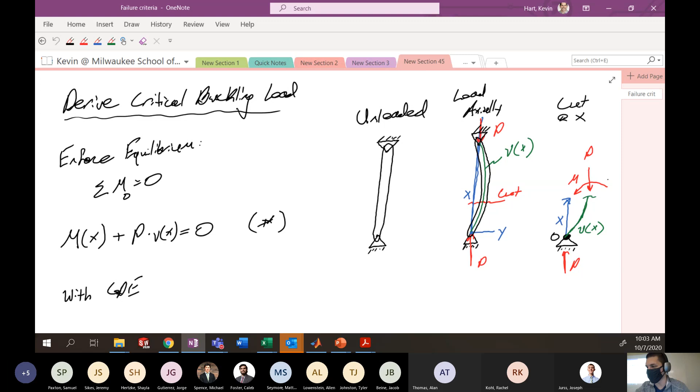Okay, so let's talk about where we were. We were deriving the critical buckling load, and these are the notes we had going last time. The basic idea is that you have some long, slender member here that's going to be loaded.

Some long, slender member that's going to be loaded axially. So we have these loads P that are being applied at the end of this structure, in this pinned configuration, and that's causing this bar to bend with this sort of curvature that you see here.

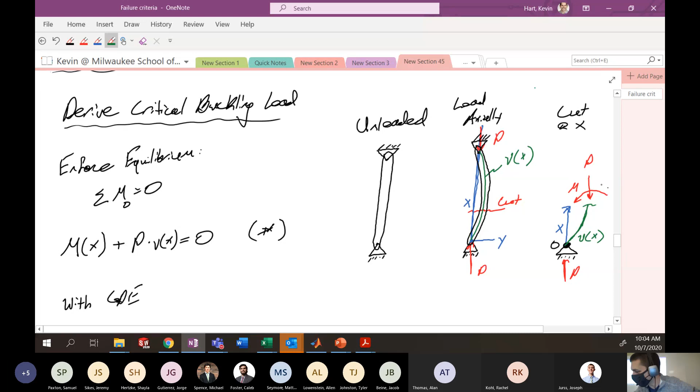The idea is that we're going to label the neutral axis of this bar that's in bending with this elastic curve, v of x, which tells us the amount of deflection from the normal x-axis. From this, we know there are internal forces and moments through the bar which we cut, allowing us to write an internal moment at that location in terms of the applied loads. It looks like this: the moment equals negative load times v of x, where v of x is the distance we've displaced from buckling.

That's our general setup here, and we're going to go through the governing differential equation of beam bending to derive the critical buckling load that would cause this to occur. So that's kind of where we were last time.

The next step would have been to look at this general governing differential equation for bending, which is v double prime equals M over EI, something you should have seen in 2004. We were making our way through that. So we did that, and put it in standard form as you see here.

And then we assigned P over EI to be omega squared. Here we're making a substitution, where omega is the square root of P over EI. That gives us this differential equation for the bending situation we currently have.

This is the equation from your differential equations class. Hopefully you talked about this very standard equation. This is an equation for a simple harmonic oscillator. If not in differential equations, hopefully you talked about it in dynamic systems. Vibrations and dynamic systems, to me, they're equivalent.

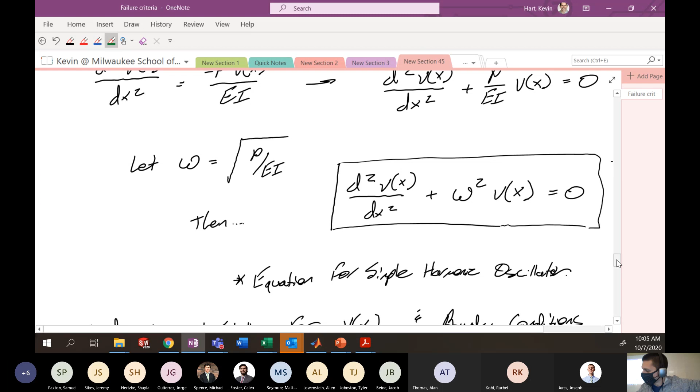But anyway, so there's your governing differential equation for a simple harmonic oscillator. And if we want to solve this equation, we need boundary conditions and a general solution. So the general solution for this governing differential equation, v of x, is given by A sine omega x plus B cosine omega x.

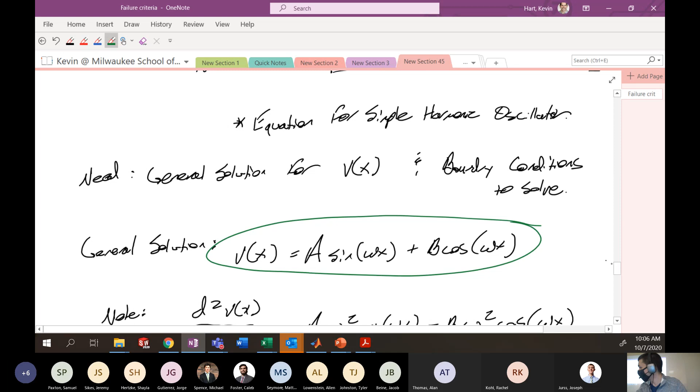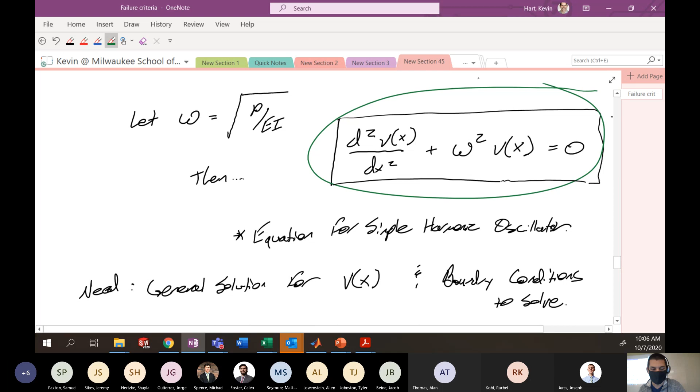And then the second derivative of that equation looks something like this. If you were to plug these two pieces of the general solution back into the governing differential equation up here, you would satisfy this equation for all values of A and B. That's what it means to be a general solution for a differential equation.

Now, to more accurately solve this general equation, we need boundary conditions to find capital A and capital B. So we were talking about some of the general boundary conditions for this beam in bending—and bending, but it's actually buckling.

Some of those boundary conditions are identified by the pinned configuration we have. We have a pin on the bottom here, a pin on the top here, and that allows us to define things about the displacement at those pins, which would be a boundary condition, and also the bending moment at those pins, which would be zero. So we laid out all of those boundary conditions here.

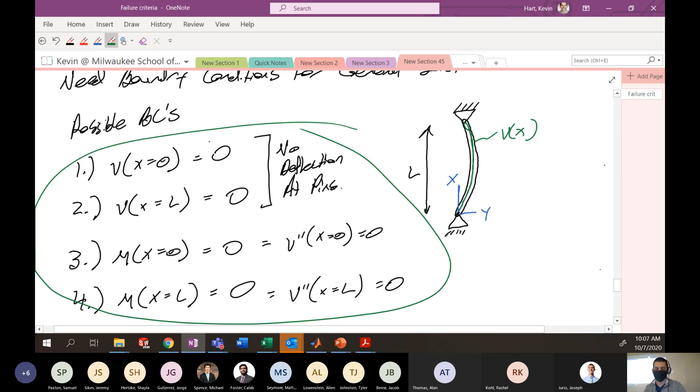We're going to use some of those to solve our general solution. We had made our way through that a little bit by using boundary condition number 3, which we said was no bending moment at x equals 0. So that is this particular boundary condition here.

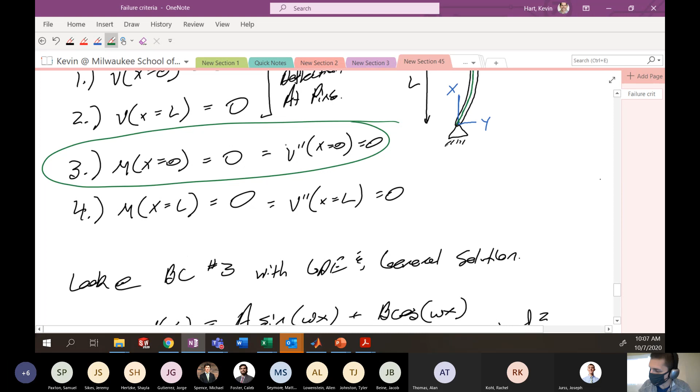And if we plug that into our general solution, and set that to be true, what you'll find is that the coefficient B is going to be equal to 0. That was using boundary condition number 3, and that simplifies our general solution down to this particular form.

Now we have to look at one more boundary condition so that we can solve for this variable, capital A. So that's about where we left off last time.

We're getting a little bit mathy, but it's all going to hit a practical point very soon. I know it was a mathy day last time. I hope you brought your math pants and were wearing your math pants. But we're going to put it to a head here and actually show what it means in reality moving forward.

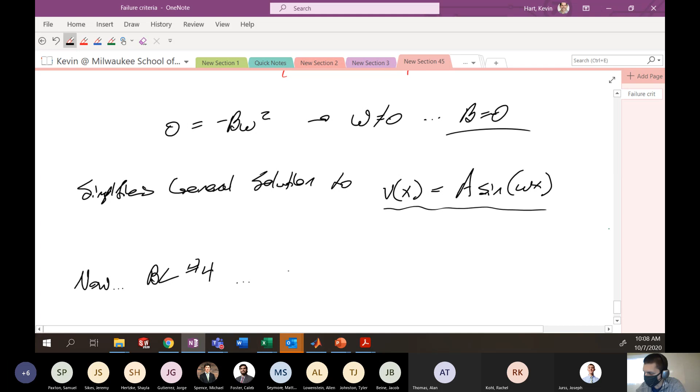Okay, so we've used boundary condition number 3. Now let's use boundary condition number 4. To remind you what that is: the second derivative at x equals L is equal to 0.

Okay, so if we work this guy down, and we want to take the second derivative of that, this is just going to be negative a omega squared sine omega x.

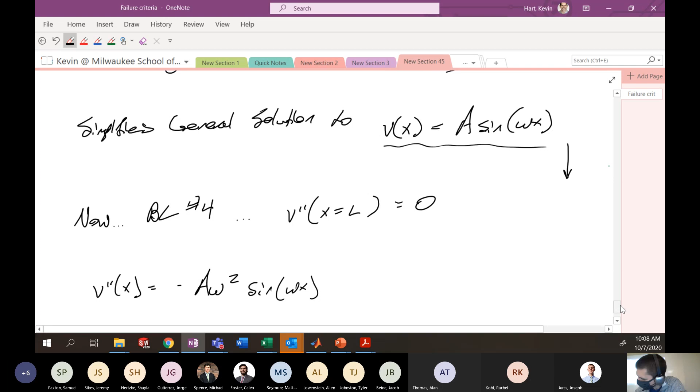And we'll insert our new boundary condition here. So if I do that, my left-hand side here is 0. And we have negative a omega squared times sine of omega times capital L, which is the length of the bar, plugging in L for x.

So the question then is, what values of A make this true? Someone give me one value of A that might make this true. Jordan says 0. Okay, cool. I agree with that. We say one trivial solution is capital A equals 0.

That doesn't really tell us anything. It just says that if we have no load on the bar, our boundary conditions are met, which is obvious. So this doesn't really tell us any information. The other more interesting condition would be if this portion of the equation were generally equal to 0. So the non-trivial bit...

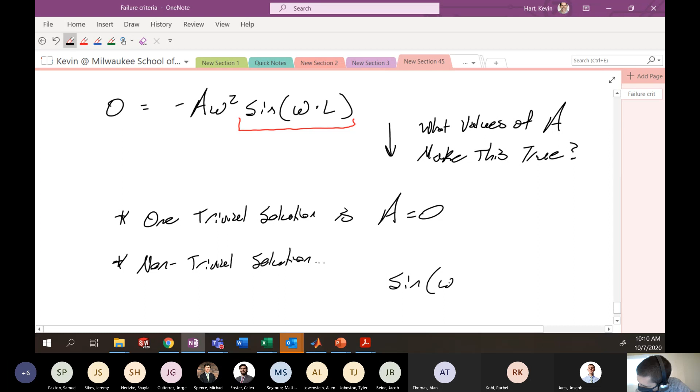is the solution sine of omega L equal to 0. This is the interesting portion for us, and I'll show you why in just a second. So if this is the important bit of information, I'll ask what values make this true for, let's say, omega L, right? How would this be satisfied? What value does omega L need to be for this to be true?

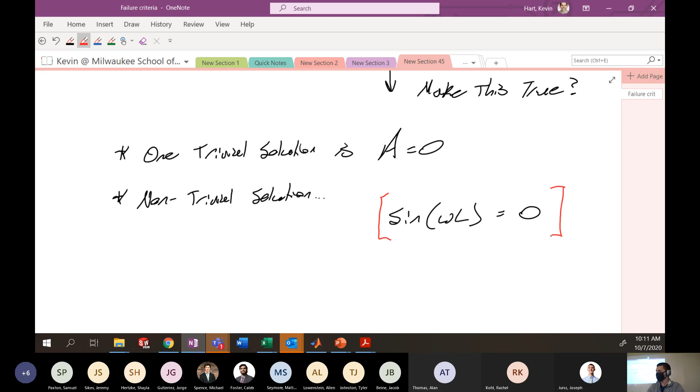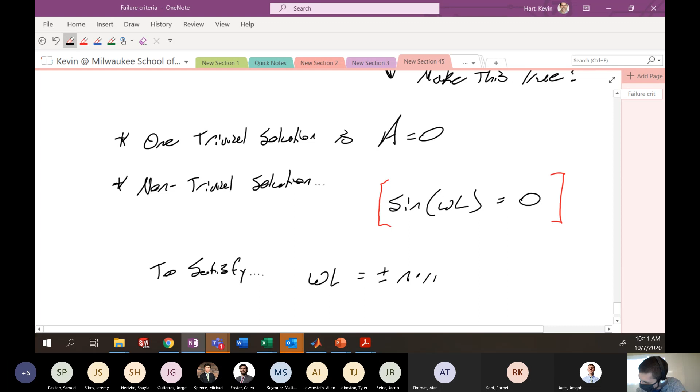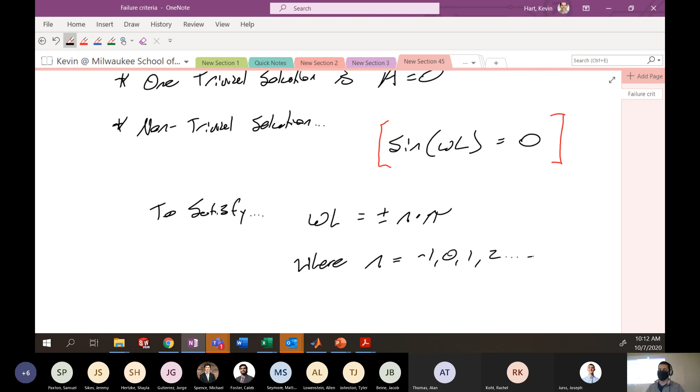0, or some integer of pi, right? So 0, pi, 2 pi, 3 pi, etc. So to satisfy this, omega L has to equal plus or minus n times pi, where n equals -1, 0, 1, 2, and so on, integer values. This is the important bit, and this is how we derive the critical buckling load. We enforce the governing differential equation must hold given certain boundary conditions, and we look at the non-trivial solution, which here would enforce that omega L has to equal n times pi.

So remember what omega L is. We'll enforce omega L equals n pi. And recall that omega, as we defined before, is the square root of P over EI. Hopefully it's all coming together. So let's plug this back in and see what value of P makes this true.

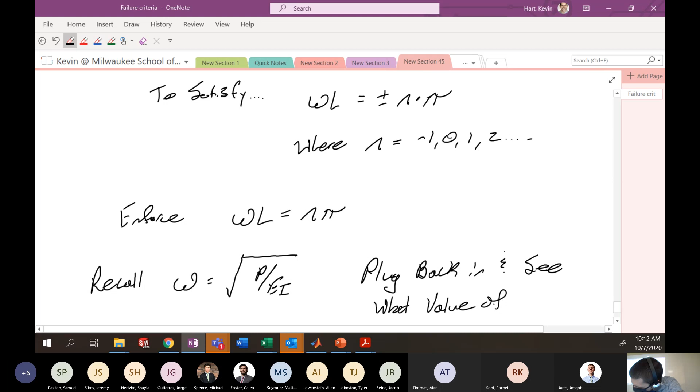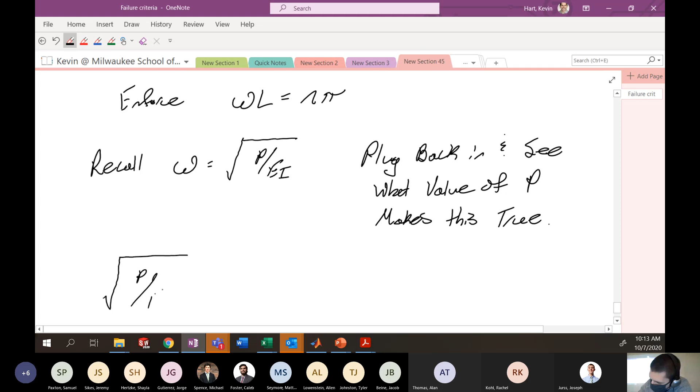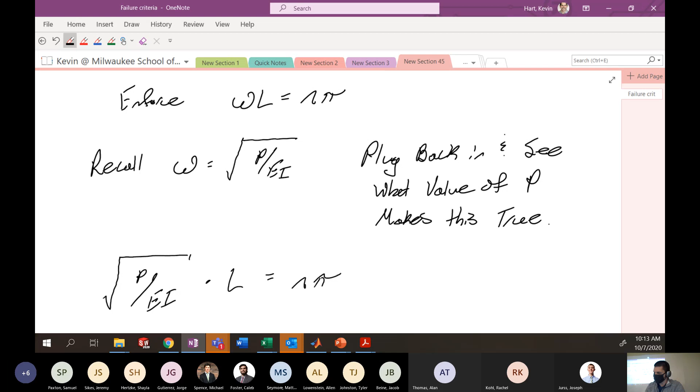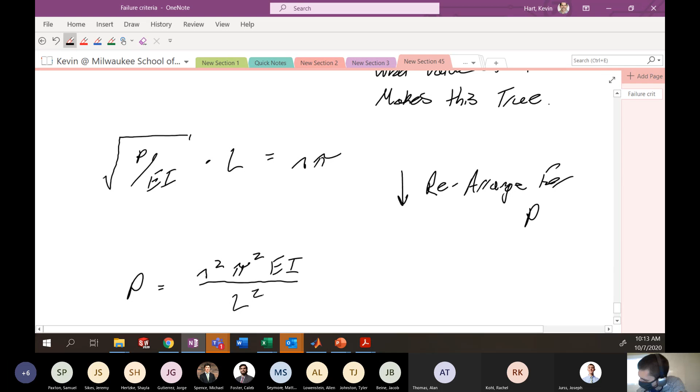So we would have something like square root of P over EI times L equals n pi. We rearrange for P, and you will have n squared pi squared EI over L squared. This is your critical buckling load for failure.

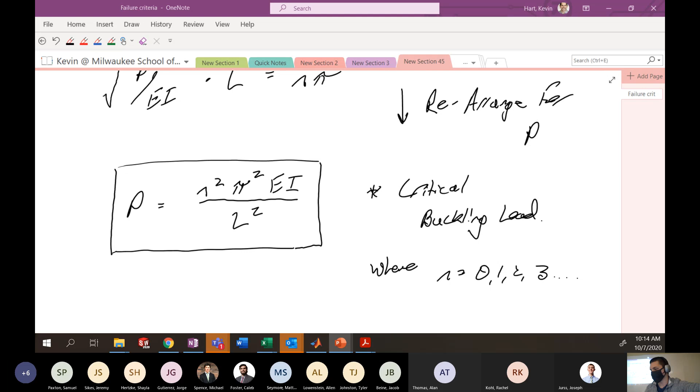Where n equals 0, 1, 2, 3, etc., integer values. Now, what does this really represent? What is the n squared? Well, let's talk about this. And what is n physically?

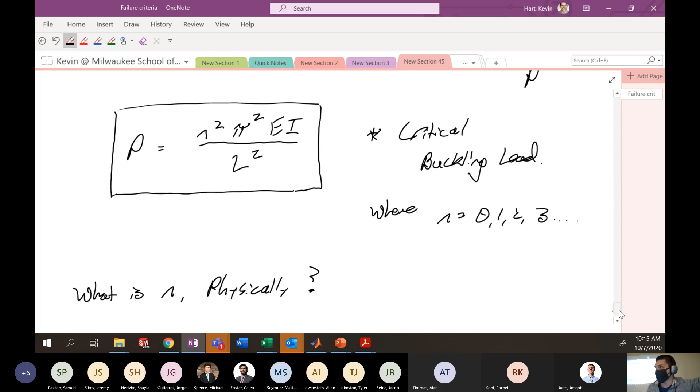Well, if we plug in n equal to 1, this would get you back to that particular equation you would have seen in your 2004 class. The picture here would look something like this. If you're applying load on the ends, this is the picture you want to have in your head. That would give you something that looked like this for your bar. It's buckling, and it's buckling in the fashion you're used to seeing.

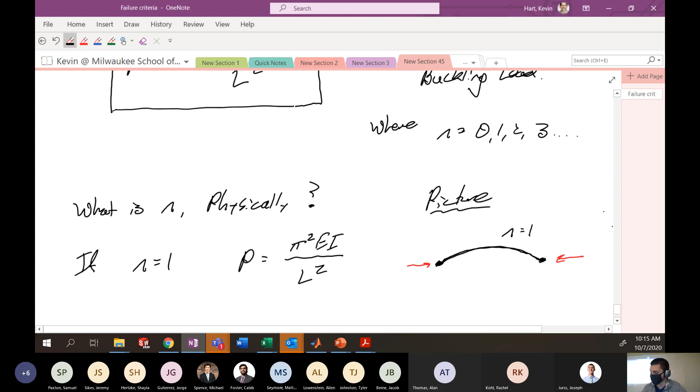This is the smallest possible load that could be induced to cause buckling. And remember, this is like V of x, and we have a general solution for V of x. Uh-oh, did I just lose the call? No, okay, I'm still on the call. Made some funny noise.

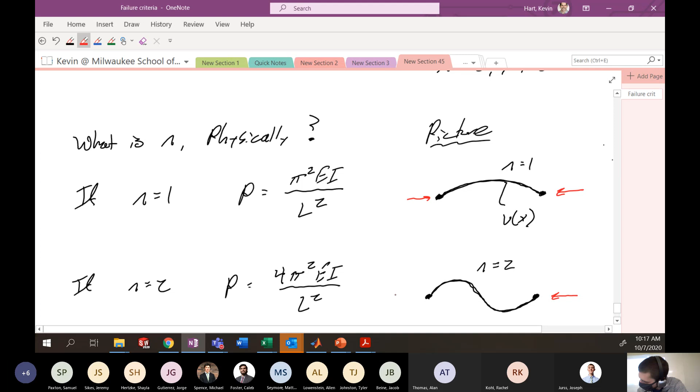You could go through a similar process and look at what happens if n is 2. Here we have n squared pi squared, so this is going to be 4 pi squared EI over L squared. The picture here, we still have the same bar, but if we use a value of 2 for n, we have a different equation for v of x that we could draw that might look something like this. And you could continue with this process.

So recall, we had this general solution that was V of x equals A sine omega x, where omega contains your p-value, okay?

So basically we're just changing the frequency of what the shape of the beam looks like with different values of the critical load satisfying the governing differential equation. If I put this amount of load on my structure, I'm going to see bending or buckling in this particular fashion. This is the smallest amount of load that could potentially induce this buckling. When we talk about the critical buckling load, we're just talking about this first modality that could potentially exist. But there are other modalities that could exist, right?

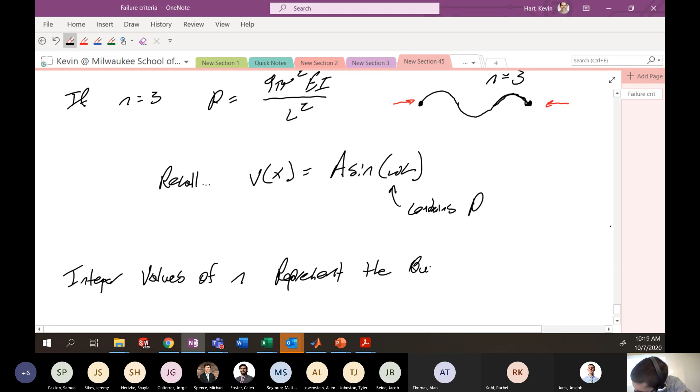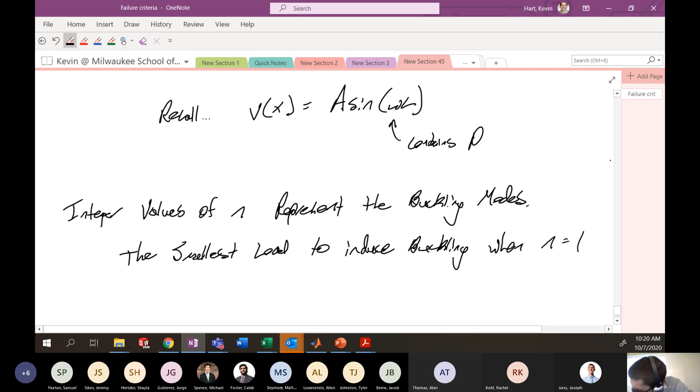The smallest load to induce buckling is when n is equal to 1, obviously, and we call that the critical buckling load. You have probably seen this as PCR, pi squared EI over L squared.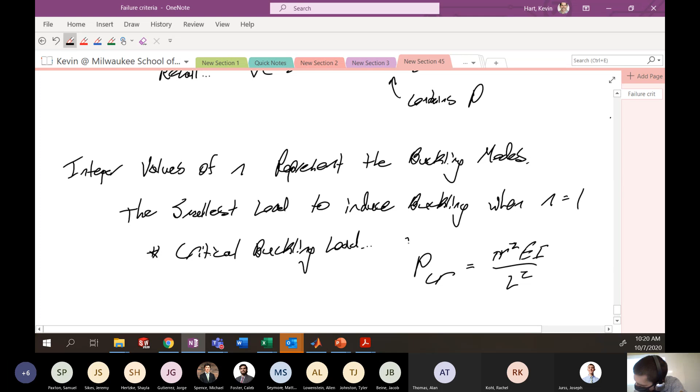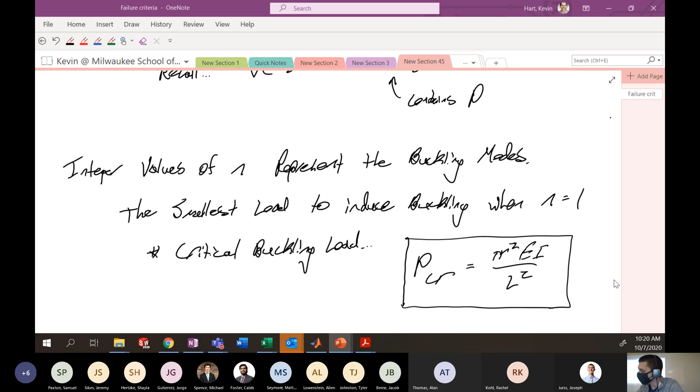So this is, again, just deriving something that you should have seen in 2004 already. There's a nice picture of the various buckling modes in the notes if you haven't seen them, so go ahead and take a look at that.

All right, so we talk about this critical buckling load, but in this class we like to talk about a critical buckling stress. That's just something that's a little bit more useful to discuss. The load is nice to know what would cause failure, but most of the time we want to talk about what stress values would cause failure because we're usually analyzing in terms of stress, not load. And when we talk about eccentric loading later, we're going to talk about the stress on the cross section, not necessarily the loads. So we want to speak about what stresses might cause failure as opposed to what loads might cause failure.

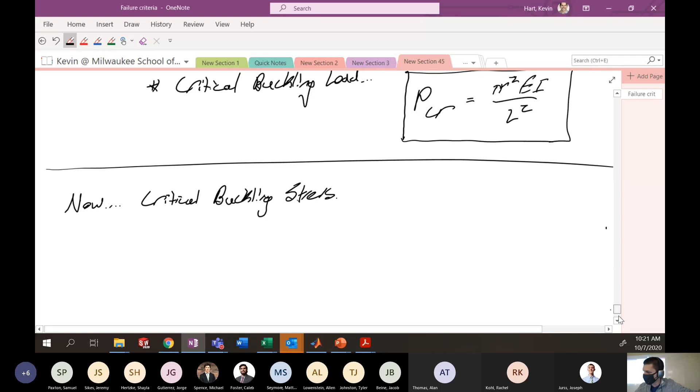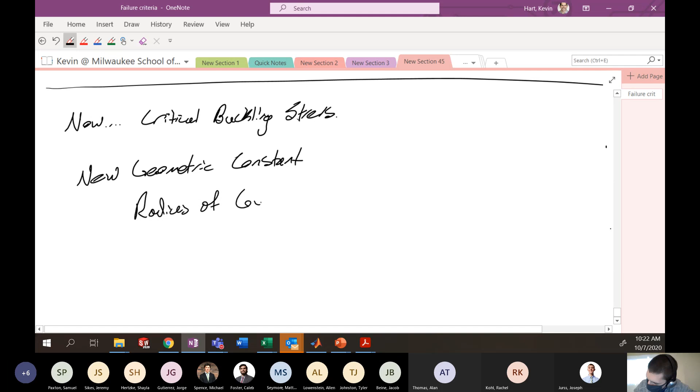So let's talk about critical buckling stress. And to do that, I need to introduce a new geometric constant, which we call the radius of gyration, usually given by the variable little r. The general expression for the radius of gyration is the square root of the area moment of inertia of the cross-section I divided by the cross-sectional area A.

So this is the definition of radius of gyration. The units are like meters or feet, length to the 1 power. Remember that this term is like length to the 4th, this is like length to the 2nd, so length to the 4th divided by length to the 2nd gets me length to the 2nd, and the square root is length to the 1st. So radius, you would think like a typical measurement.

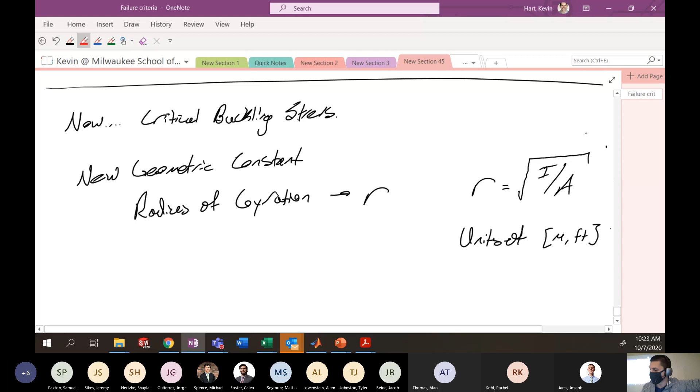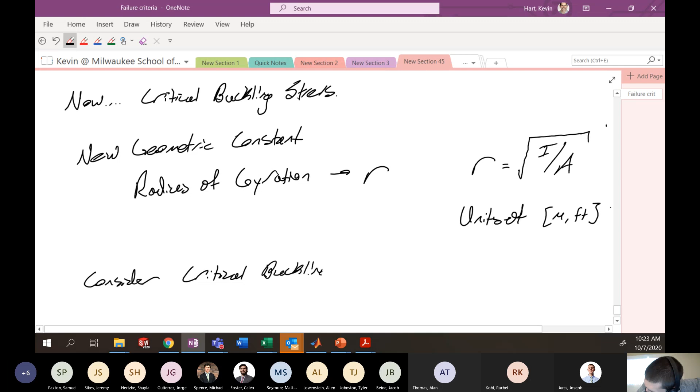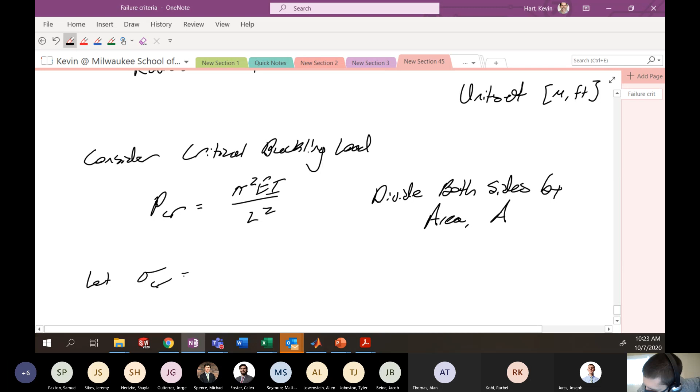So why is this important? Well, it's important because if we talk about failure stress or the critical buckling stress, we take the critical buckling load and divide by area A. That would give us a critical buckling stress on the left-hand side. Critical buckling load divided by the cross-sectional area gives the critical buckling stress on the left-hand side as pi squared E times I divided by A, all over L squared, because remember, I need to divide both sides by A.

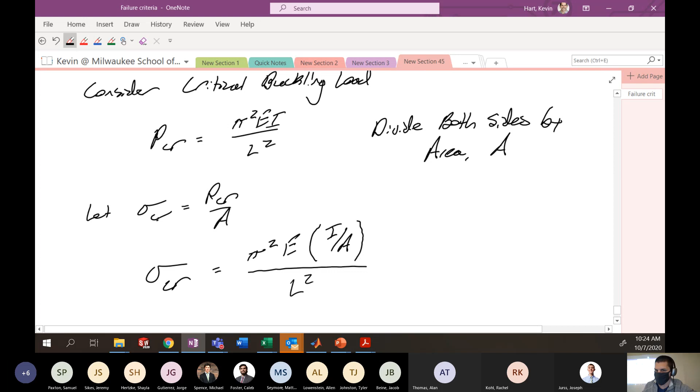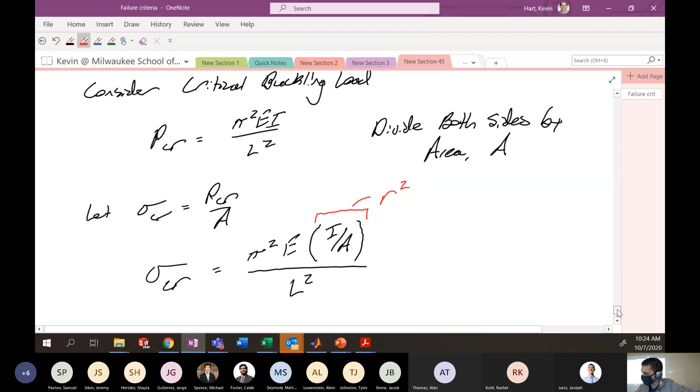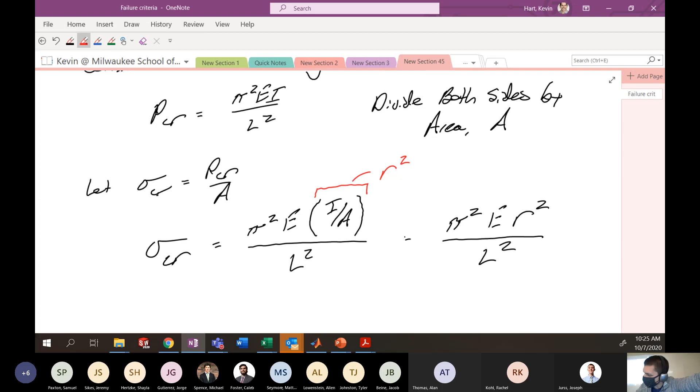Okay, we just introduced the radius of gyration, so this guy here is actually the radius of gyration squared. Nope, it is the radius of gyration squared. So this could be rearranged as pi squared E R squared over L squared. Or strangely, it is sometimes written by bringing the radius of gyration into the denominator, so we can bring this term down into the denominator. And it's sometimes written, most commonly written, as pi squared E divided by this term L divided by R, squared. This is your critical buckling stress.

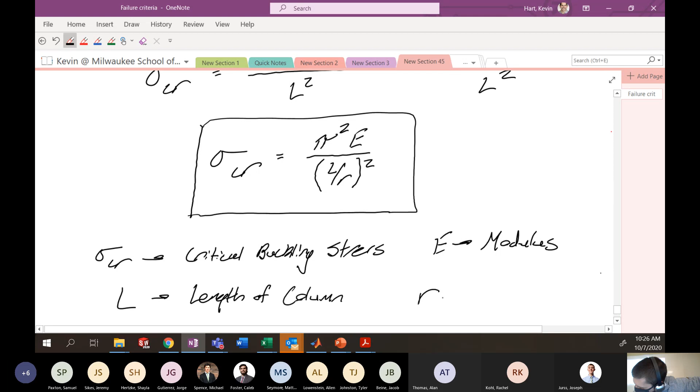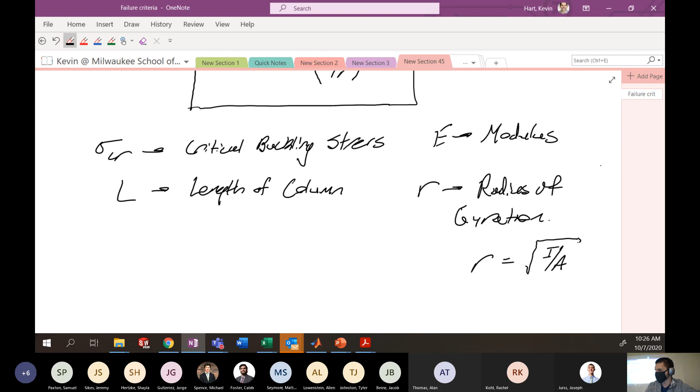Maybe time to define some things. This is the critical buckling stress. E is obviously the modulus. L is the length of the member or the column. And R is the radius of gyration, which we just defined above, as the square root of I over A. Interestingly, this little term in the denominator has a special name. We define this value L over R as what's known as the slenderness ratio.

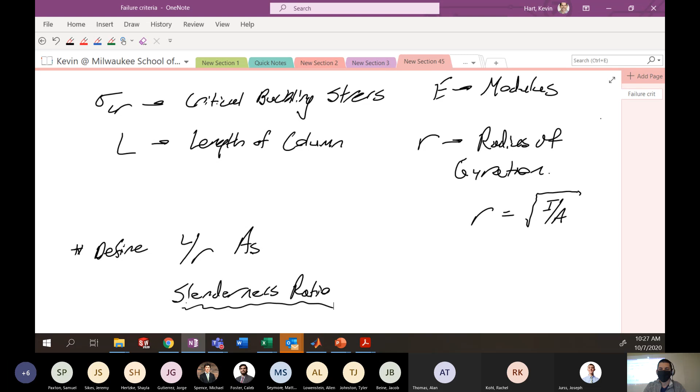This gives you an idea of how slender your column is—how long is it versus how large is the cross section. The bigger your cross section, more or less, the larger R is going to be, and the smaller your slenderness ratio is. It's an indication of how resistant your structure is going to be to failing by buckling. This slenderness ratio is a very important quantity when it comes to determining whether or not your material is going to fail.

Now let's consider a situation where we're loading up some rectangular cross section. Let's talk about preferred buckling direction.

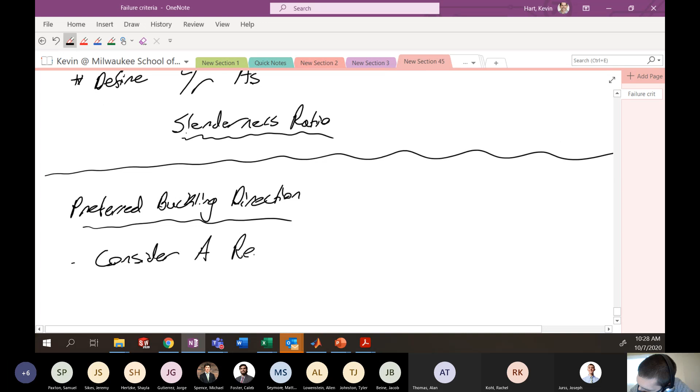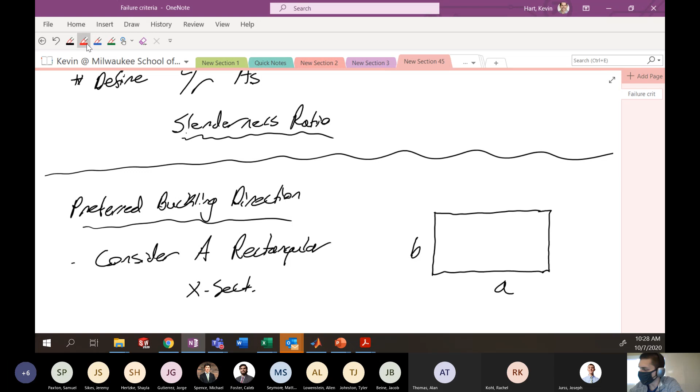So let's consider a rectangular cross section. I'll draw it here, calling this side length little b, side length little a. And I'm going to say there's a coordinate system here on this cross section, sort of at the center—like x, y.

My question is, if I load this particular column on an end fashion, about which axis will this cross-section buckle? It could potentially buckle about the x-axis, or it could buckle about the y-axis. It could potentially bend about each one of these axes.

Nobody has a ruler on them, do they? I wish I hadn't forgotten my ruler. Dang.

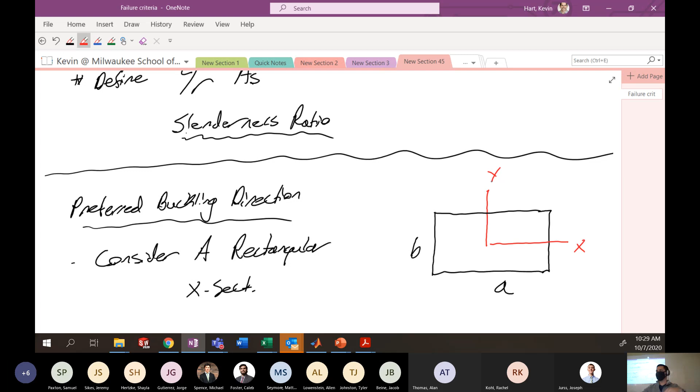But the point is that you're loading up these edges, and you want to know: if I have the cross section of this general shape, is it going to bend about the x-axis, kind of like by the right-hand rule, or is it going to bend about the y-axis, kind of like by the right-hand rule? I think it's rather intuitive from a practical standpoint, if you've ever done this with a ruler, that it's going to bend about, in this instance, the x-axis. So if you compress this, it would tend to bend around x. But I want to show mathematically why, and I think we have the tools now to show why that is.

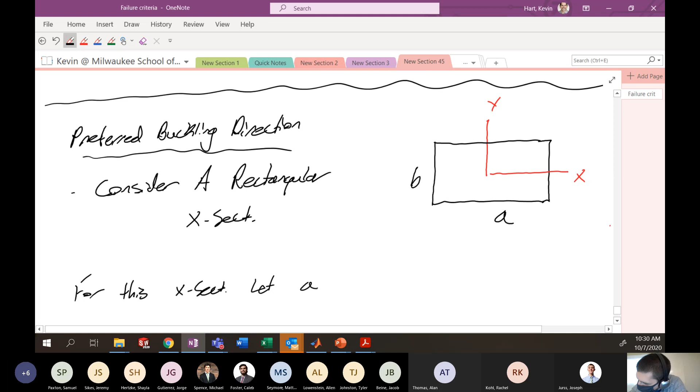So let's consider—we'll let A be greater than B. Then we can consider the area moments of inertia and the radii of gyration about each one of these individual axes separately.

Area moments of inertia are the following. The area moment of inertia about x is going to be 1/12 A B cubed, and the area moment of inertia about y is going to be 1/12 A cubed B—I don't know why I wrote square, this should be cubed. So if A is greater than B, then obviously I-Y is greater than I-X. I think that's pretty obvious from these equations.

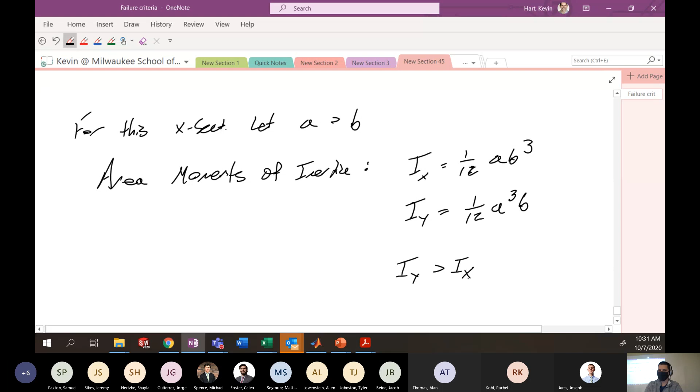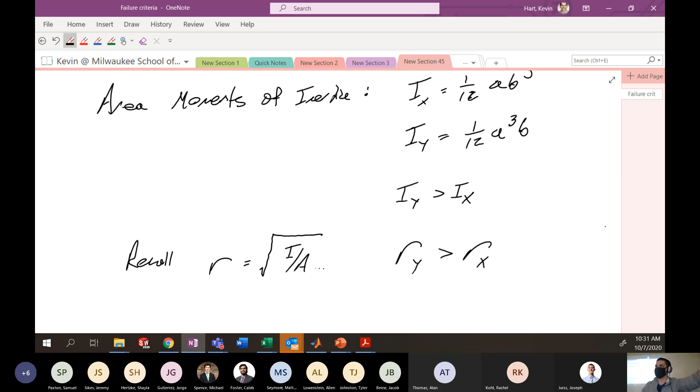And if we recall that the radius of gyration is the square root of I over A, then it's pretty obvious that the radius of gyration in the y direction is going to be greater than the radius of gyration in x. Because the area doesn't change from situation to situation—the area of the cross-section stays the same—the radius of gyration in each of these two different directions follows this particular relationship.

This is useful because it allows us to define the slenderness ratio, which allows us to look at what the critical stresses are to cause buckling. So then slenderness ratio—remember, a slenderness ratio is L over R—is going to have the following relationship. What am I putting here, greater than or less than?

If Ry is greater than Rx, what goes in this inequality here? Less than. Right?

And now with sigma critical equal to pi squared E over the slenderness ratio L over R squared, you'll see that the critical buckling load Y compared to critical buckling load X is going to have what relationship? If this is less than this...

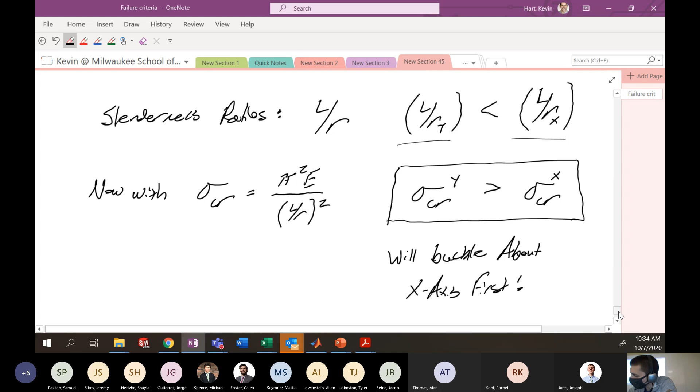Okay, and if we go back to our picture, we can envision that. So here's our particular cross section. If I loaded it into the plane, it would want to bend about the x-axis.

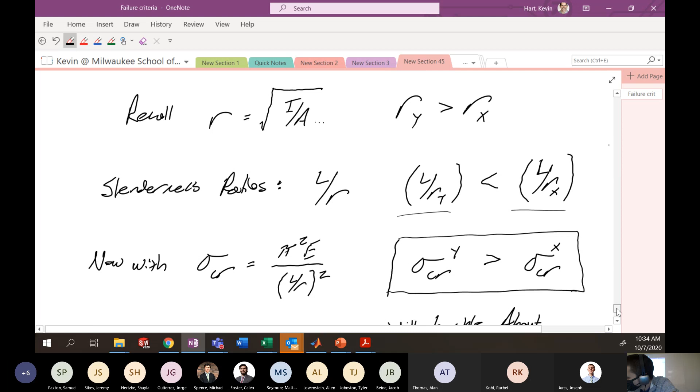Okay, so in general, columns...

Spelling is hard. Have you guys ever seen that shirt where it's like, I'm an engineer, I'm an engineer, I'm an engineer, and engineer is spelled wrong every single time, crossed out, crossed out, crossed out, and then it says at the bottom, I'm good at math. That's pretty funny because we're terrible at spelling, but we're good at math, in theory.

About the axis with the smallest slenderness ratio. Smallest? No, largest slenderness ratio. Sorry. The more slender it is, the more likely it is to buckle about that axis.

All right, so let's do an example. We'll wrap it up today.

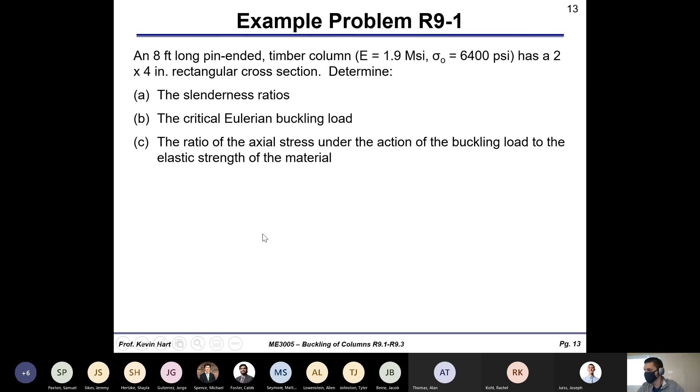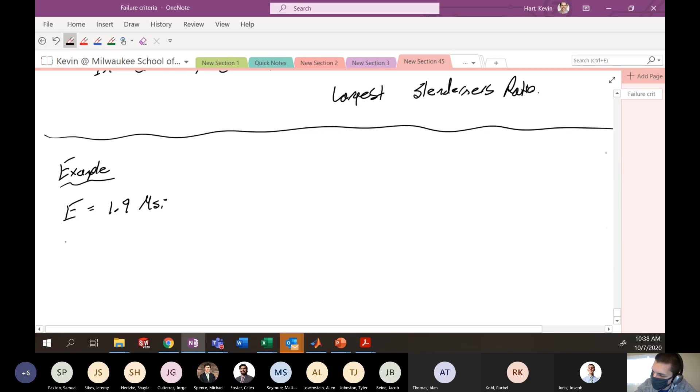We have this example. We have the modulus given to us for this particular material, 1.9 MSI. We have the yield stress of the material, which comes into play in part C of this problem, 6,400 psi. We're told that it has a length, and this particular column was 8 feet.

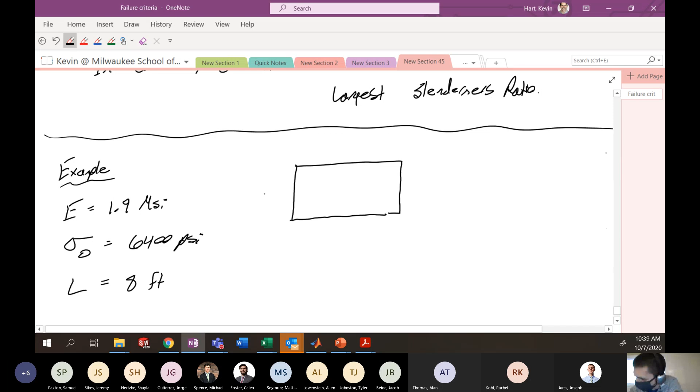And we're given dimensions of the cross section. I'm just going to draw the cross section here. This is 2 inch by 4 inch. So here we go, 2 inch by 4 inch. And let's put some coordinate system on this guy to make our life easy. X and Y.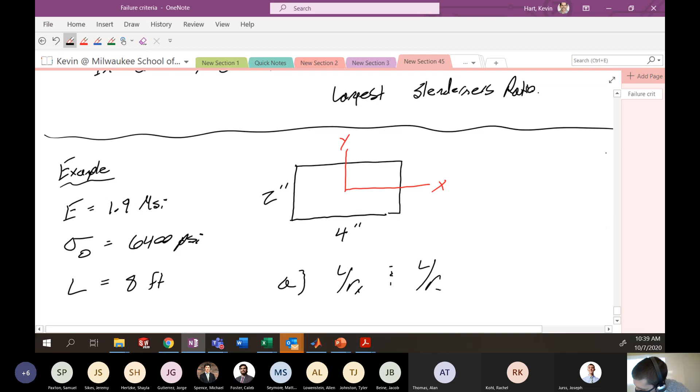All right, we want to find first, what we're looking for in part A is the slenderness ratios. So that would be L over Rx and L over Ry. These are our slenderness ratios about X and Y.

In part B, we want to determine the critical Eulerian buckling load, so here that's PCR. And in part C, I want the ratio of the yield stress to the critical buckling stress. Let's call this capital R, which is the yield stress to the load that would cause buckling.

Those are the things that we're looking for. Let's dance. All right, so here we go.

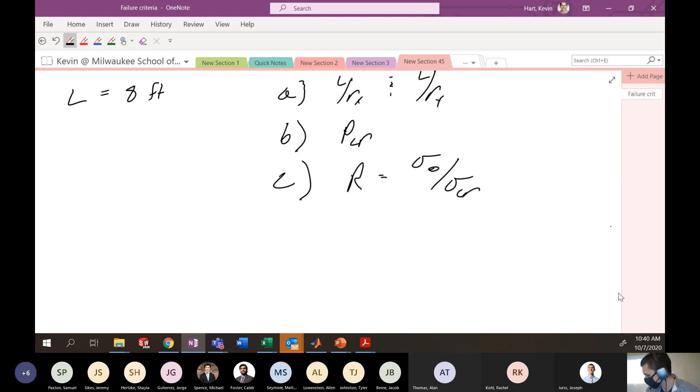Part A: to calculate our slenderness ratios, we need the radius of gyration. We need these radii of gyration. And so let's do this.

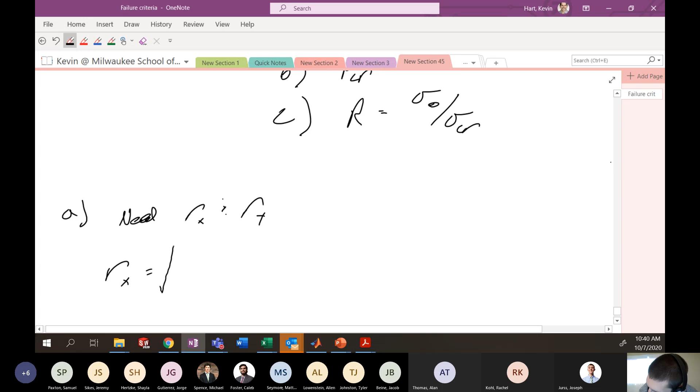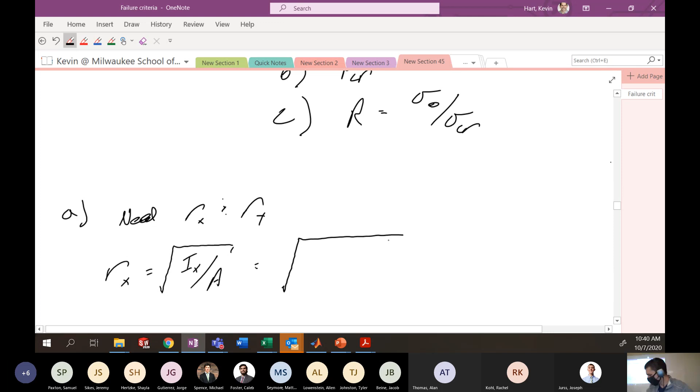Rx is going to be the square root of the moment of inertia about the x-axis divided by the cross-sectional area of the piece. So this is going to be 1/12 bh cubed: 1/12 times the base, which is 4 inches, times the height, which is 2 inches, cubed, all divided by the cross-sectional area, which is 4 inches by 2 inches. So my radius of gyration about x, if we work this out, is 0.58 inches.

Similar kind of idea for radius of gyration in y: Iy over A, which is 1/12 hb cubed. So this will be 2 inches times 4 inches cubed, all over my area, 4 times 2, units inches squared. So my radius of gyration about y here is going to be 1.15 inches.

Now let's find my slenderness ratio.

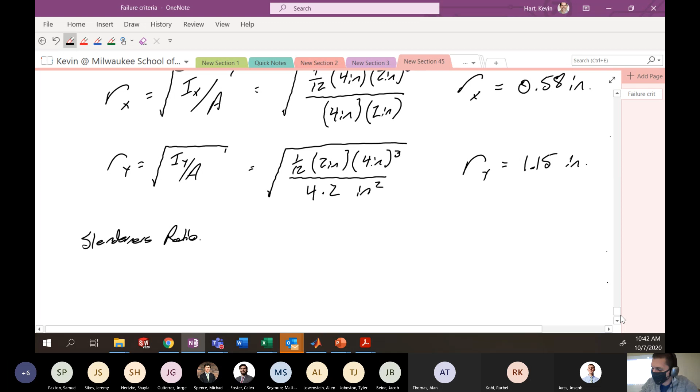So let's do about x first. The total length I'm told is 8 feet. Better not use 8 in this equation, we want 8 times 12 because we're working in inches, all over my radius of gyration in x, which we said is 0.58.

This will give me a slenderness ratio about the x-axis. Here it is going to be 166. Similar for y.

Except here now we'll use a radius of gyration about the y-axis, 1.15 inches. And this will give me a slenderness ratio about y, which is 83.5.

Okay, so my dudes, since it's Wednesday, my dudes, what axis am I going to buckle about?

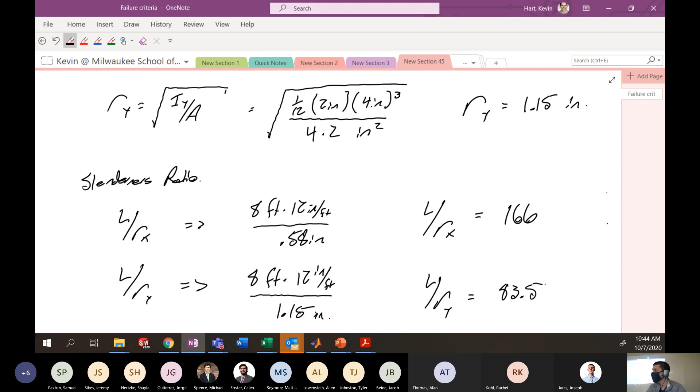Which axis is more slender? X, right? So the slenderness ratio about x is larger, so we're going to buckle about x.

These are the answers for part A.

So we'll buckle about the x-axis because it's more slender. That particular axis is more slender.

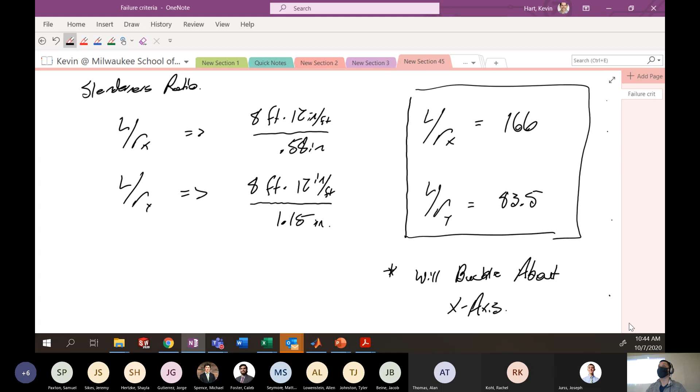So we're going to buckle about the x-axis. This is important for us to know because when we do the calculation of the critical buckling load, which is sort of part B of this problem, we know our general equation is something like pi squared EI over L squared. And it helps us determine what value of I we're going to use.

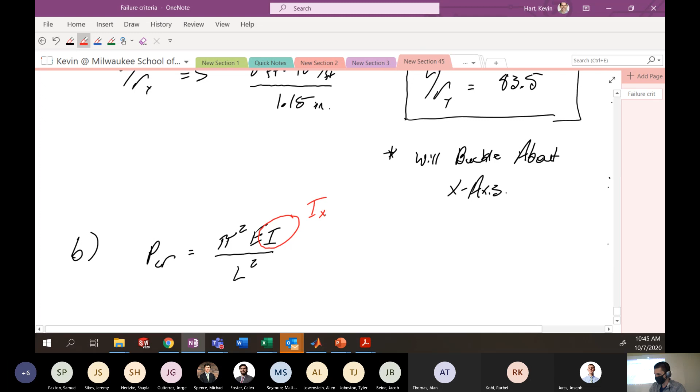Okay, since we're buckling about the x-axis, here we need IX. So this is just kind of a plug and chug, so let's just do it.

Pi squared, my modulus I was told is 1.9 MSI, multiplied by IX, which is going to be 1/12 BH cubed, which is 1/12 the base, which is 4 inches, times the height cubed, which is 2 inches cubed, all over the length of this member squared. Just don't forget to multiply by 12.

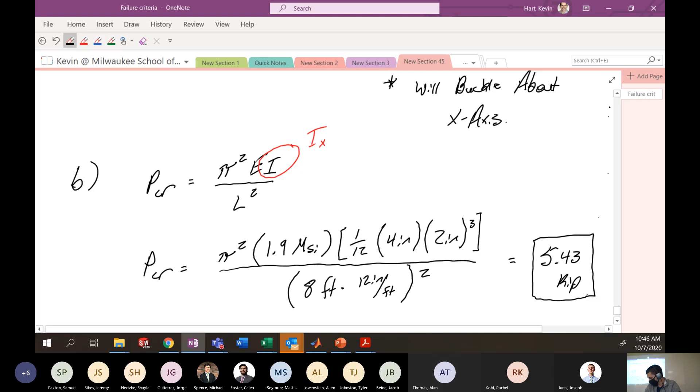And you're going to have a critical load for buckling here of 5.43 kips. Okay, it's 5,430 pounds. Okay, baby.

Let's roll. On to C.

Part C, we're asked for the ratio of the yield stress, or the failure stress, to the critical buckling load. So remember, we're trying to solve, let's say, capital R for ratio, which is the critical failure stress divided by what would cause buckling, the stress that would cause buckling. So we need the stress that would cause buckling. It's pretty obvious that's just going to be the load that would cause buckling divided by the cross-sectional area for centric loading.

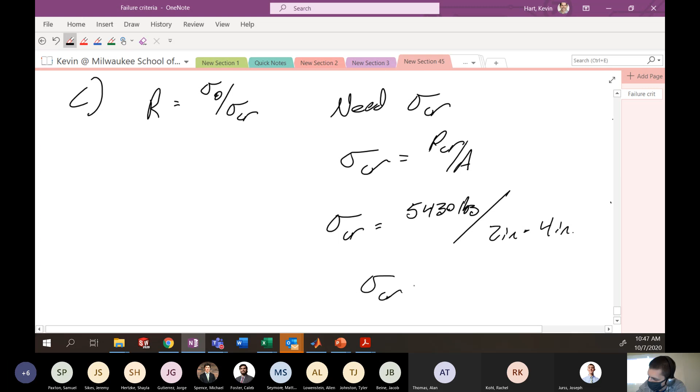All right, so we know the load that's going to cause failure is 5,430 pounds divided by the cross-sectional area, which is 2 inches times 4 inches. Or the critical stress that would cause failure by buckling is going to be 679 psi.

It's sort of an intermediate solution, so I'm giving it a nice box. And finally, this ratio.

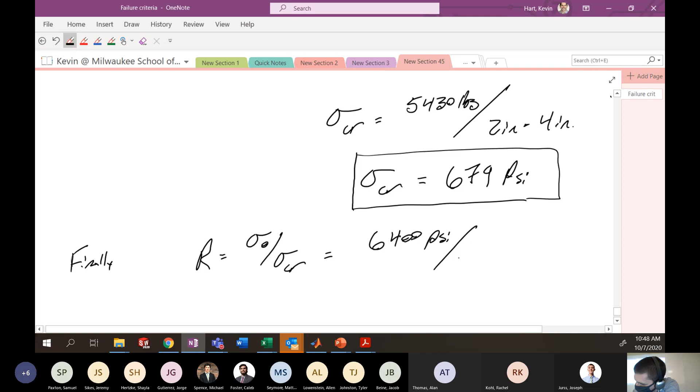We're given the yield stress, or sort of the failure stress. I guess the timber is not really going to yield, it's just going to sort of fail. This failure stress here, we're given as 6,400 psi in the beginning of the problem, divided by the stress that would cause buckling, which is 679 psi. And we'll get a ratio here that's approximately equal to 9.4.

All right, so what does this ratio actually mean physically? Well, that means if you designed your column to fail by the failure stress, you're like 10 times more than what's actually going to fail, okay? So you done messed up, okay?

Because it's going to fail by buckling 9.4 times lower stress than what you anticipated or originally called for in your design. So you can sort of see why it's very important to consider this buckling mode of failure, because you could fail at significantly lower loads and stresses than you might normally anticipate if you were just designing to the failure stress of the material.